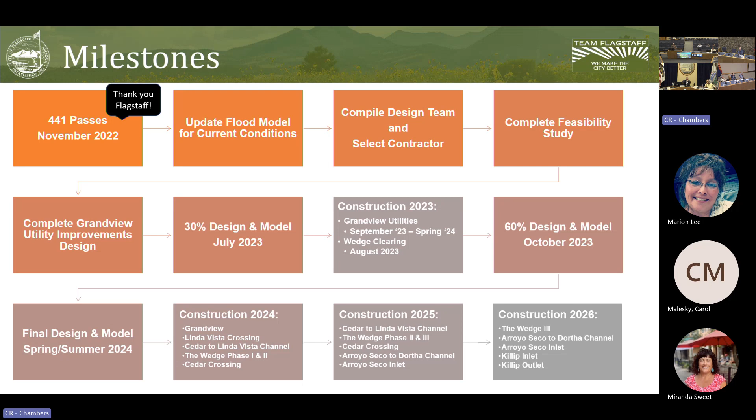Here's a suite of projects, starting from Killip Elementary going up just past Linda Vista. I'll go a little more into detail than this.

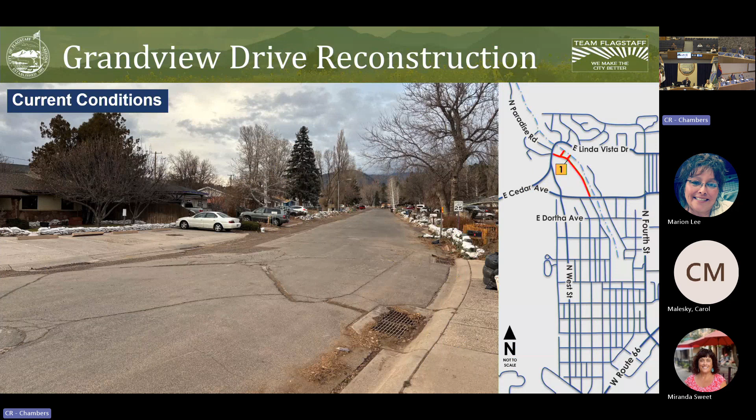First project, Grandview Drive reconstruction. So that's what it looks like right now. Once complete, it's going to be an inverted crown. They've already finished utility relocations, and they're starting on the curb, gutter, and roadway right now.

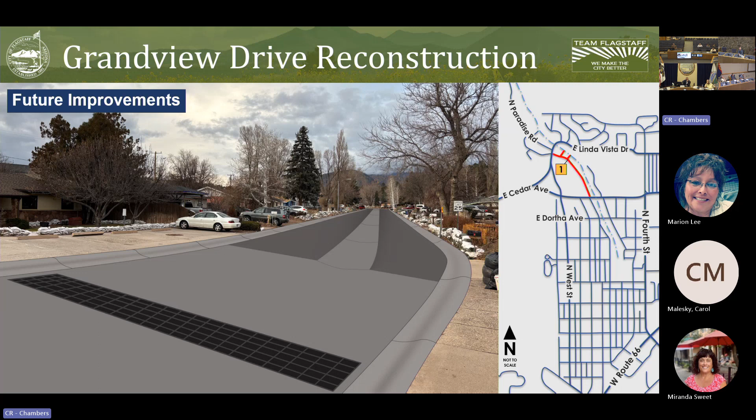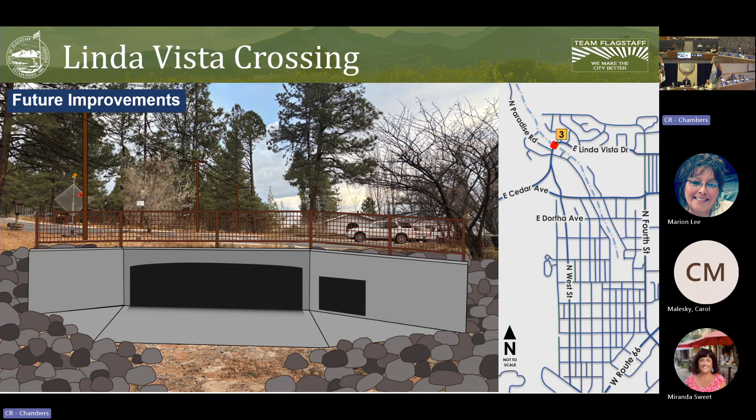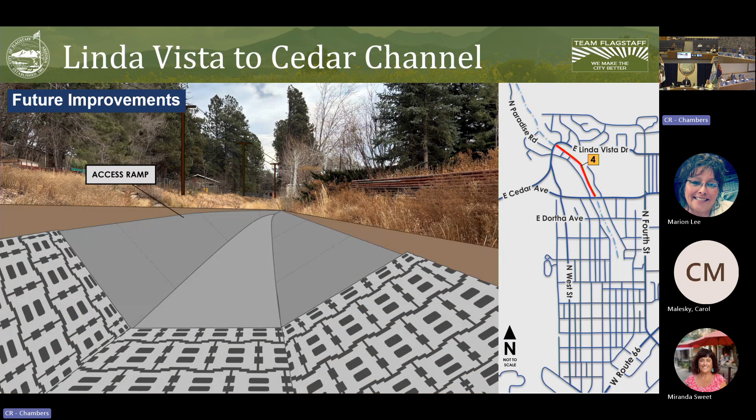From Linda Vista down to Cedar, here's the current natural open channel. That's what it'll look like after concrete - gives it a little more capacity.

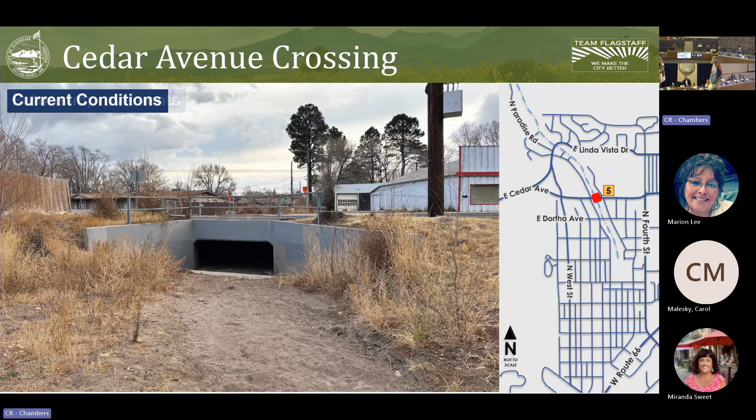Once we get to Cedar Crossing, there's the current crossing. It's undersized right now - we'll put more capacity under Cedar.

Arroyo Seco channel, going from Dortha to the inlet near Arroyo Seco townhomes. This will be removing the existing 60-inch storm drain underneath that channel and making a much larger concrete channel.

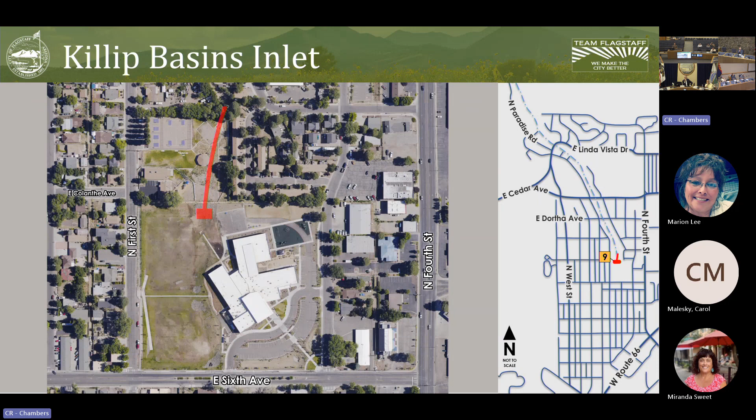There'll also be a new inlet right at Arroyo Seco townhomes, as well as an inlet to push water to the regional detention basins that are already constructed, as well as a new outlet that'll connect to 6th Avenue.

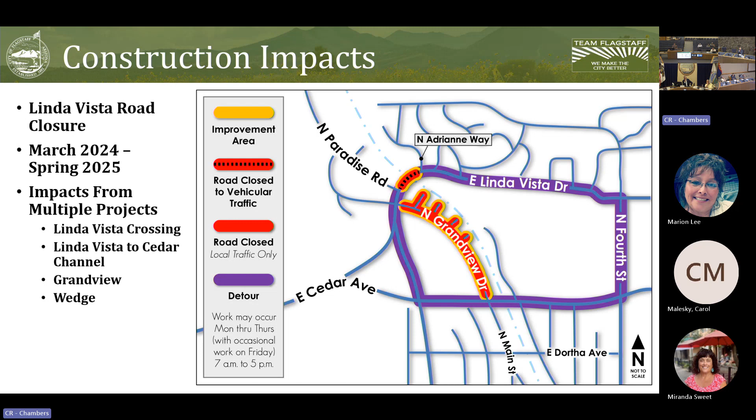Some construction impacts: Linda Vista road closure, that's a big one this spring to next spring because of all these different projects. They need to close that down. You can see the detour if you're up in Shadow Mountain.

This spring, this month, next month, there are utility relocates near Linda Vista. There's going to be some impact to water pressure. We haven't noticed much yet, but we're monitoring that.

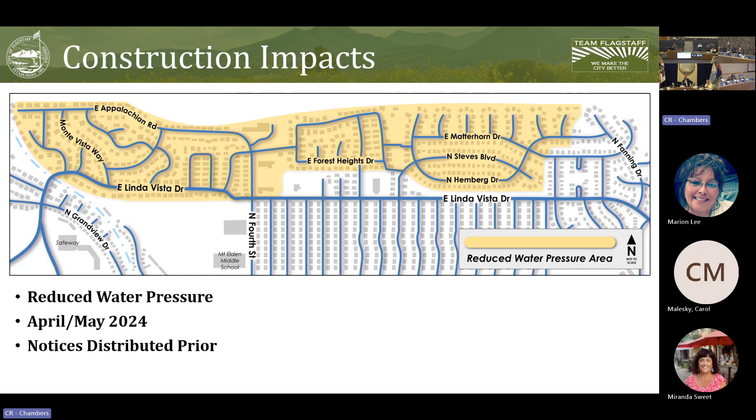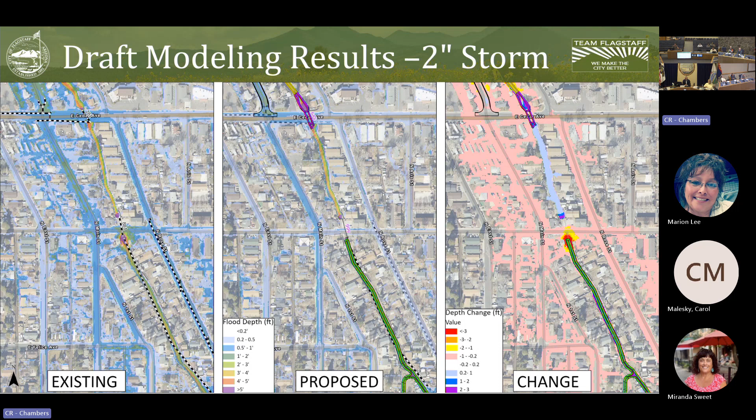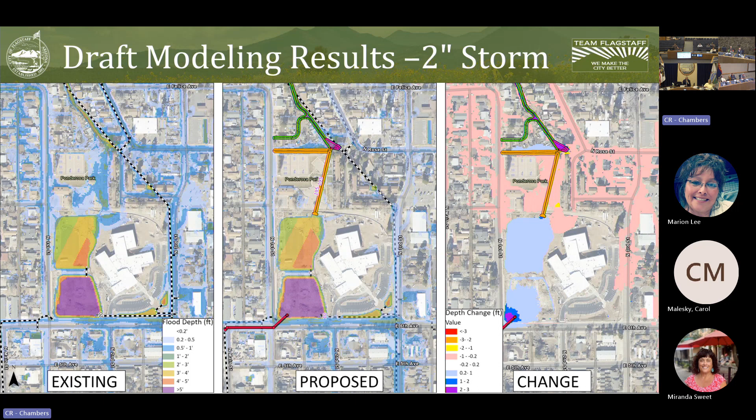Next, I'll talk about Schultz Creek. There's kind of - excuse me, would you like to take questions at the end, or should we ask as we go here? I'm happy to wait to the end. Yeah, I'd probably prefer end.

Stabilization projects in city limits for Schultz Creek, work on Stavana Way, and yeah, the big one is the 180 crossing. That's the long-term mitigation, about 7 million to complete. We're still on track for July 1st completion date. That's a dual 8x5 concrete box culvert going under 180 under Grand Canyon Trust property.

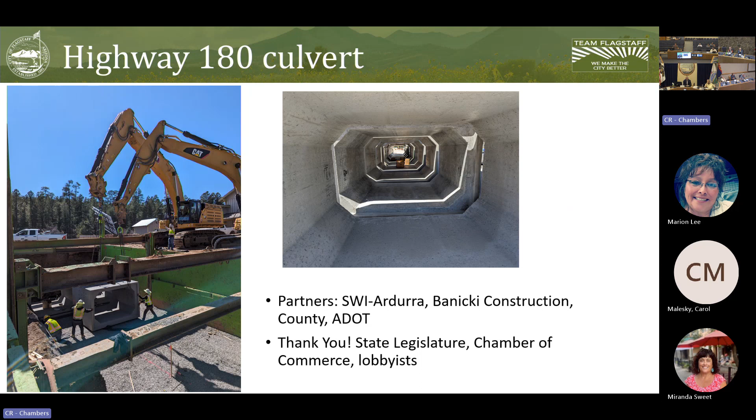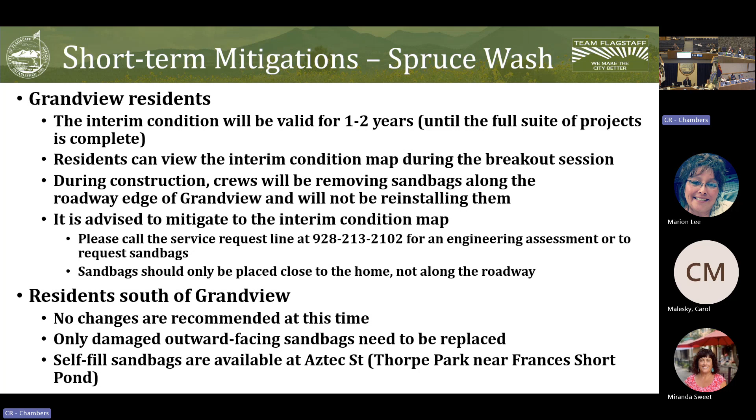For Schultz Creek, during monsoon season, after July 1st when they construct that, we won't have much time to do removal, as we'll be doing monsoon preparedness and mostly flood response, so we won't have as much time. But if there's good sandbags, you can put those back at Thorpe Park near Aztec.

Flood insurance - I'm not a flood insurance agent, but all I know is it's a separate policy from your homeowners. You can get it on FEMA's website. We're a class 5 community in the CRS program, meaning if you're getting an NFIP policy through FEMA, it's a 25% discount. And there's a 30-day waiting period usually to get that policy.

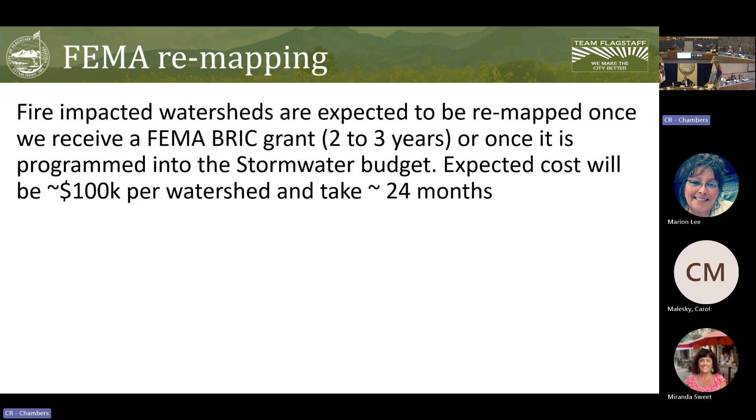FEMA remapping - I'm not as familiar with this, but I know we're waiting on a grant that could be 2 to 3 years, or until we get it programmed into our stormwater budget. These are big letter of map revisions, could be 100K per watershed, and takes a lot of back and forth between FEMA to get these remapped officially.

We have a flood prevention grant through our sustainability office. It's up to $5,000 for flood proofing materials, sealants, floodgates, things like that. Yeah, I can take questions now.

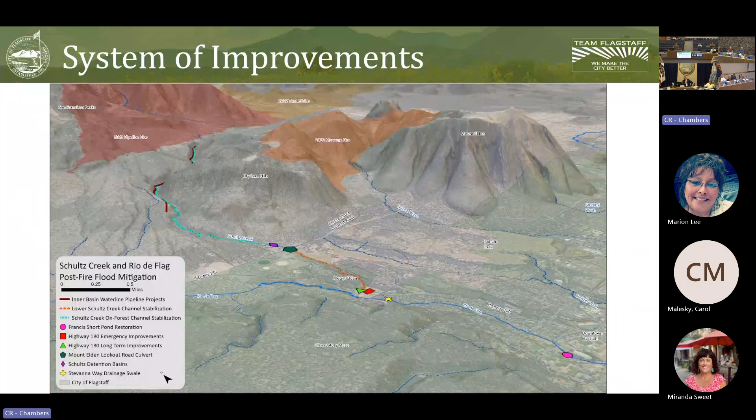Could you go back to that image of the Schultz underpass? There it was. Yeah.

If I'm reading that correctly, it looks like that culvert still has a pretty substantial dog leg in it. I'm not familiar with a dog leg. Well, it's that part that looks like it passes underneath 180 at that angle, versus the main part of the culvert that runs more or less straight out to the Rio de Flag.

Yeah. I don't have an answer for you right now, but I can definitely look into that with our designer. We can get back to you with that.

Yeah, I'm just curious why they opted for that as opposed to a straighter shot to the Rio de Flag. Yeah, this isn't probably a good answer, but basically the best option was to go through the Grand Canyon Trust property, so we kind of had to angle it that way based off property rights and what we could buy. Thank you.

Do you know what the capacity, cubic feet per second, is for that structure? I think it's around 900 to 1200 CFS, but don't quote me on that. If you want an exact answer, I could get you one upcoming.

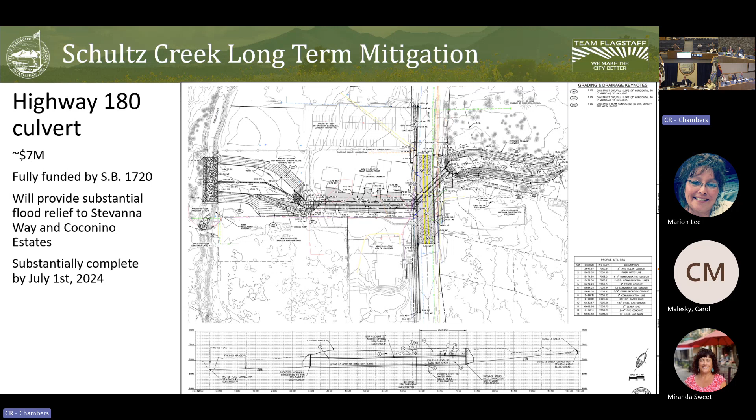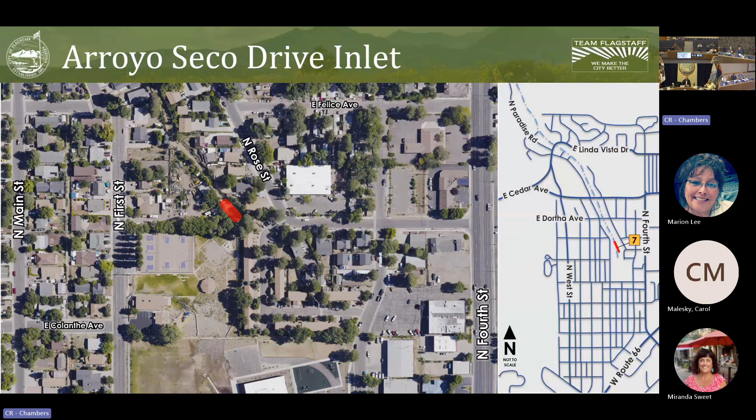Yeah, back on Spruce Wash, could you describe the function of the wedge again? I did not follow what the design concept is there. I've seen the construction across from the Safeway store, and it's kind of a puzzlement how that's going to work. Yeah.

Downstream, we don't have enough capacity, so we have to bleed off. I forget what the CFS is, but maybe 100 to 300 CFS. As everything's passing through the rest of the wash, once that passes through, we'll start bleeding off this detention basin, and hopefully the channel won't be full of water, so we can bleed it off that way.

So it's an alternative route for the water to take. Is that passive, or are there pumps involved? It's passive. As far as how we discharge it, that's still being designed - whether it's an automatic or manual gate, they're still working through a couple options.

What's the capacity of that basin? I don't know that number off the top of my head. I've done some walking up in that area, and there's a couple of retention basins toward the upper inlet. What's the state of that? I haven't been up there for a little while, but those are complete - we're just about to do final walkthrough. Do you know the capacity? Is there two up there, or more than two? I forget the capacity, but those are more for sedimentation, dropping out sediment rather than retaining water.

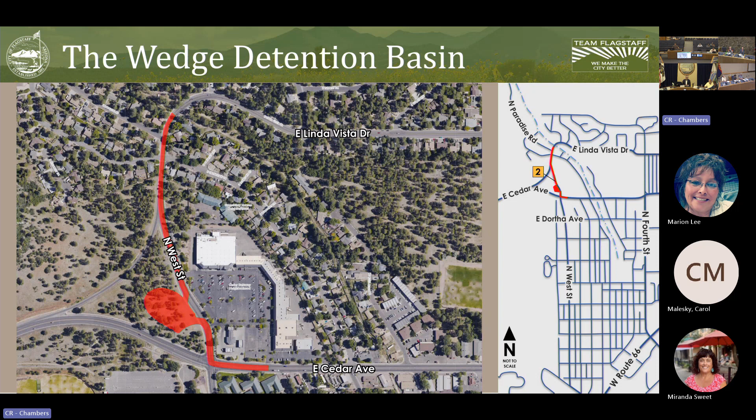At the last meeting, I had asked for an update on the Rio de Flag Headwaters pre-fire study with the County Flood Control District. By way of background, there were some emails not everyone here was included on, Mr. Chair I think you were. The discussion had to do with the County Flood Control District doing watershed management and tree thinning in the upper Rio watershed. There was an email from Ed indicating that the Rio de Flag project would be able to handle most of those post-fire floods, which led us to ask: well, what's going on here? If the Rio project is going to handle these flows, why is the county doing this?

I'm going to try to read this, if it's okay with you guys - dry throat and all. So the question is about the upper Rio forest thinning. There was an article in the paper indicating the city would experience extreme flooding; NAU even produced cost of damages. And then, as I said before, the Rio project can handle most of these flows, according to Ed.

So a couple of questions - you don't have to answer these, and as I speak the ice gets thinner for me, I apologize ahead of time. Did the flood control district study consider the Rio project and its ability to handle these increased flows? Did the city have any impact on this project? I'm assuming the answers might be no. I encourage the city and the flood control district to develop a formal project review process. Lastly, I'm aware forest management has many benefits not related to flooding - I'm specifically talking about flooding. That's it, thank you.

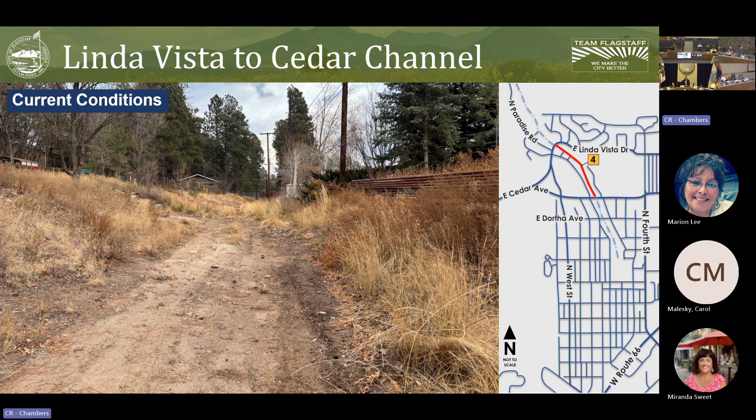Good evening, Commissioners. Erin Young, Water Resources Manager, and I'm just here to introduce Carol - you've seen her many times before. We have an abbreviated presentation that was provided to Council on Tuesday night. They did adopt the notice of intention to increase or change water, sewer, reclaimed water rates. Carol's second slide actually includes the outcome of the meeting, which was a request to have a special work session where council can review the modeling assumptions and we can have a live modeling session with them to check the sensitivity to making changes on those parameters. So with that, we'll go through the abbreviated presentation and go from there.

Any questions before we get going? Okay. Yeah, thank you, let's go. Thank you, Carol. Thank you, Erin, and good evening. Can everyone hear me okay?

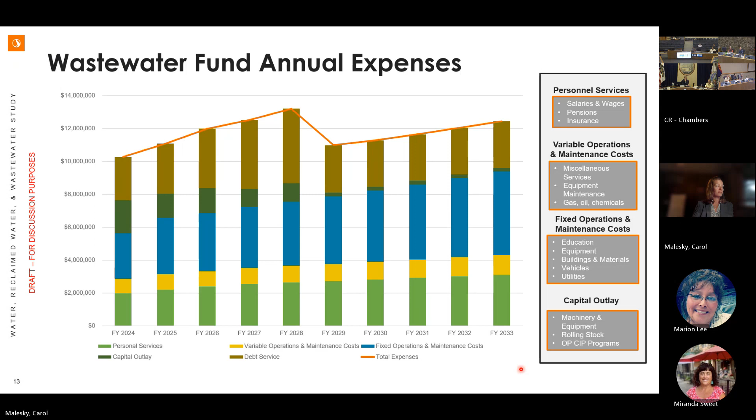The wastewater CIP list is shorter than the water fund list. However, there are some significant projects included. What is not included are 2 main categories. One is this note at the bottom: there are projects that were funded through a general obligation bond with the city, and those bonds are being repaid with property tax revenues. So those projects are not included on this list, and that's not included in the rate calculation.

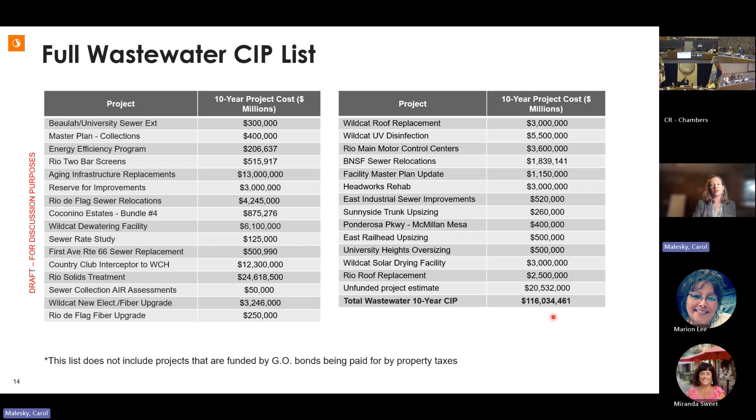Another project not included in this list is the wastewater treatment plant future expansion, which is included in the capacity fee study. But the 116 million of today's dollars in wastewater CIP costs that you see here are what we used when moving forward with the financial plan.

Just as in the water fund, we escalate those capital improvement projects. The total is estimated at 144.1 million through 2033. You'll notice we're fairly certain about the mix of funding in the near term, but as we go forward, we're still looking to fund some projects perhaps with debt or future loans. No grants are forecasted at this point, but that can change, and Management Services is currently looking at all of these funding sources as well.

When we started this rate study, this is the mix of funding we are looking at. Again, the majority of revenues for cash funding the capital projects is from rates. I need to also note that even though we are borrowing money for a significant portion of this capital plan, those borrowed funds have to be paid back, and that is also through rates. So ultimately, that comes back into the revenue requirements each year.

Similar to water, we have this wastewater projected plan to fully fund all the CIP projects we talked about. This plan looks at 2 years of 25% rate adjustments, followed by 15% in 2027, then 10%, then 5%. That initial bump is needed to pay for the current level of projects in the near term. And again, just like in water, once we run this through the cost of service analysis and the rate analysis, a customer may not just see a 25% increase in their bill. It could be less, it could be more.

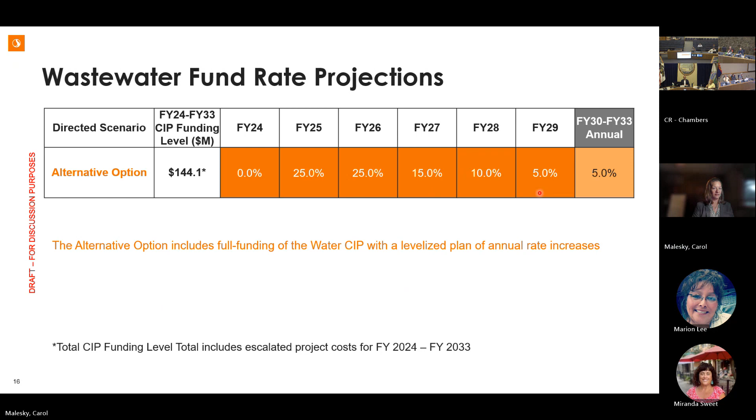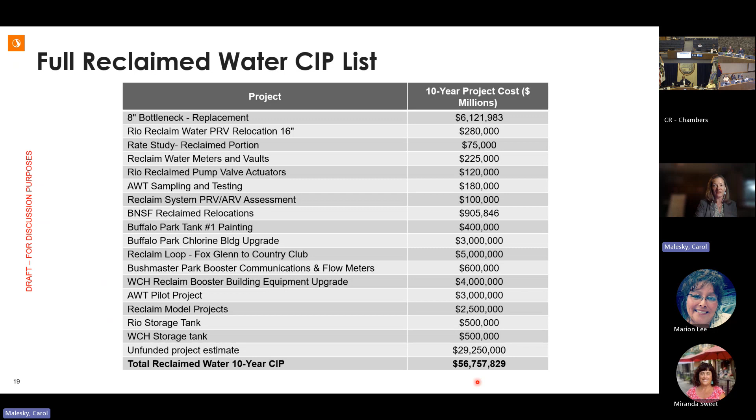The Reclaimed Water CIP list is shown here. The full list with all of the projects that were in the approved 5-year CIP, plus the informed CIP from the master planning process and the unfunded projects, totals almost 57 million in today's dollars. We know that the actual execution of these projects is limited, because of the policy of setting reclaimed water rates as a percentage of potable water rates. I know we've had that discussion in the past, but that limits the amount of projects that can be completed.

Given the potable water recommendations and direction, the reclaimed water direction and rate adjustments will take us to about 11.3 million in projects that could be funded through 2033. This is entirely through revenue collected from reclaimed water rates. That reclaimed water rate plan, directed back in October, again mirrors what we saw in water: 15% rate adjustments.

And we've made it through financial plans. I can keep moving through capacity fees if you like. That'd be a good idea. Yes, please. Thank you. Okay, great.

Capacity fees are that next section of the rate study that takes a look at new connections and growth-related expenses. I'm going to cut to the chase and tell you, based on your review and recommendations and council's review and recommendations, direction on capacity fees are the following items.

We are applying the combined methodology for water and wastewater capacity fees when calculating these fees. There are 3 typical methodologies that the American Water Works Association and Water Environment Federation promotes. The combined methodology is that third method that takes into account historical investments in infrastructure that new customers can benefit from, plus forward-looking investments in infrastructure that are growth or expansion related. So the combined method takes into account both of these types of infrastructure.

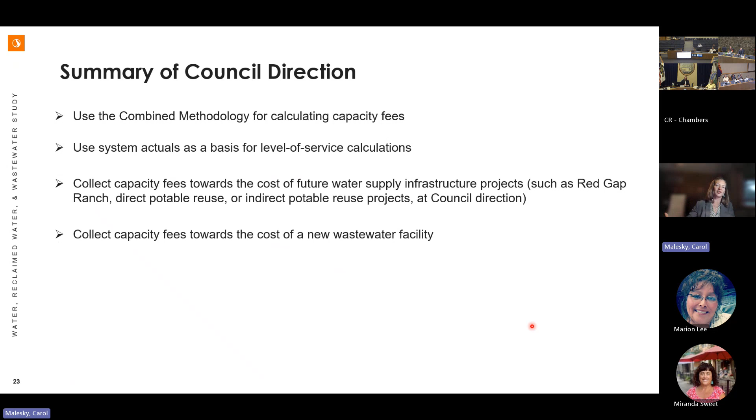And then the recommendation is that Water Services sets aside an amount to help fund those projects in the future. The same is true on the wastewater side. So the direction was to collect capacity fees to start bolstering up the funding sources for a new wastewater treatment facility.

And then finally, we were looking at levels of service for wastewater that included not only a flow or hydraulic component, but also a loadings or strength of wastewater flow component. This multi-based level of service is important because your future wastewater projects are more geared towards increasing the capacity of treating solids at your treatment plant. So incorporating that strength of flow element is important when determining how new customers might impact your system.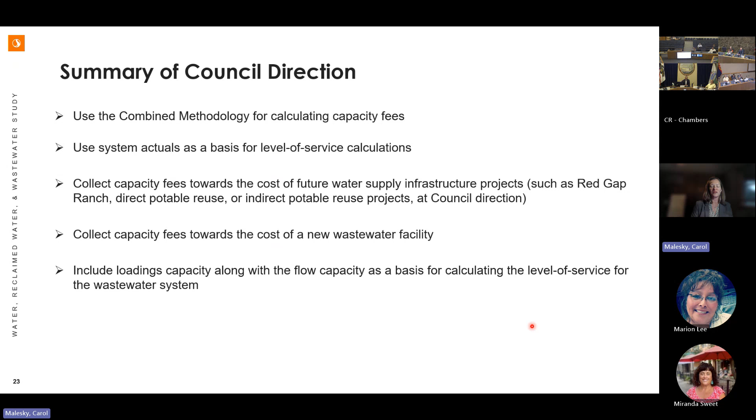Pulling all of these points together, we've calculated the fees, and you've seen these slides before, but I'm going to start with water. The set of water projects that include a growth component is listed on this chart. So we have 70.5 million of the 10-year CIP projects that include growth. However, we've also added in an estimate of $230 million for future water supply projects.

Pulling those pieces of information into the calculation of the capacity fees and going through all the other options, we have the recommended or directed option that we called 1B, the future water supply and new groundwater capacity option. This option used actual system data for level of service, and it included that additional cost for future water supply projects. It resulted in a capacity fee for a 3/4 inch residential type connection, or ERU, equivalent residential unit, of $8,146. That fee is then scaled based on water meter size.

As an example, we show a 2-inch commercial meter. It could be a 2-inch landscape meter. It could be any kind of customer, but it's the meter size that's important here. And that would be an increase for that new customer of about $13,000.

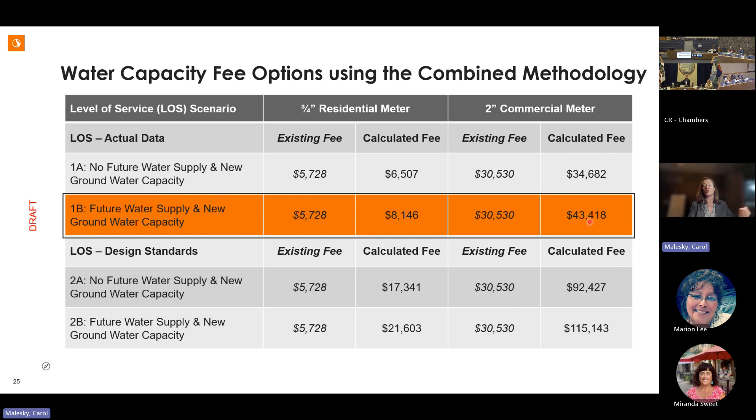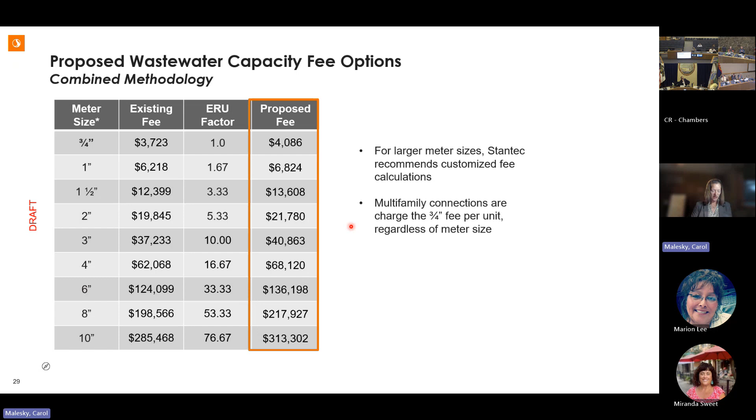Mr. Chair and Commissioner Vane, we do have an assumption here, but it is based on capacity. So if the treatment plant contributes, it increases capacity at 9 million gallons per day. We actually calculate a unit cost in gallons per day, and we say one equivalent residential unit on the wastewater side requires around 300 gallons per day. So that 9 million gallons per day can serve a lot of equivalent residential units. We do the math, it's actually very simple math. We take the 9 million gallons per day and the 245 million and determine what that dollar figure is. I can't do that math in my head, but it's probably pretty easy. Then we add that and say every equivalent residential unit that is added to the system just picks up their cost of that capacity.

Got it, I understand. Thank you. Okay, good. Thanks.

Any other questions on this?

What I wanted to avoid was the perception that when we get to the end of this rate study period, there's $240 million sitting somewhere to fund all this, because it could be interpreted that way, and it'll be a shocker for those in the community that didn't quite understand that. So that's why I'm asking.

Mr. Chair, thanks for that observation. We don't have that in our report right now, but I think we need to make that clear. Because if you got all of your equivalent residential units that would use up the 9 million gallons per day, the calculation should result in 245 million, but that doesn't happen. Growth happens over time—you have to build the project before growth all shows up. So it's just a unit cost of capacity. We'll make sure we mention that in the report.

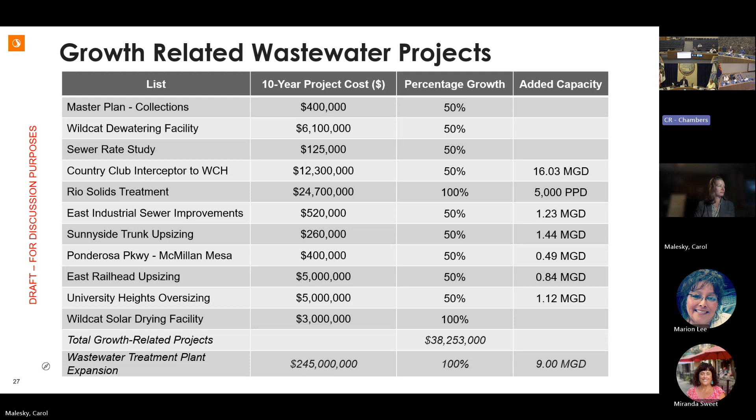When you go back to that table, you can see using the design standards really drives that number up, because the design number—for wastewater it was like 360 gallons per day—is higher when the actual use is less, but you still have to build to the design standards. So your meter placement would still be for that design.

To further what Carol was saying about the capacity and the wastewater expansion, you can see it on the chart. Even if we were to use actual flows and loading - options C and D - the first option did not include that expansion, and option D with the wastewater expansion included shows a delta of about $200 difference in capacity. So on a $240-250 million project, the difference is about $200 per equivalent residential unit.

To her point, we're not looking to recoup all of that, and we knew that at the time. Capacity fees are currently about 6% of the revenues coming in. We know there are other opportunities for funding - grant funding, cooperative partnerships - that'll be looked at. Even though it wasn't currently programmed in the 10-year forecast, we knew it was coming. The sooner we start carving out revenue and setting it aside, the better position we're in compared to waiting till it hits the plan - that impact would be different, and getting ahead of it allows for a compounding effect.

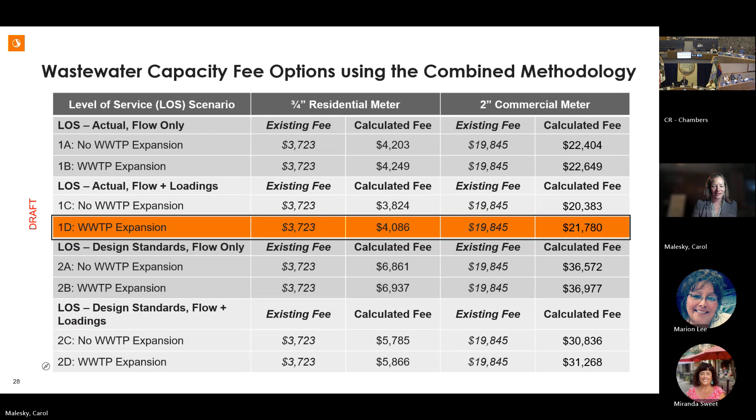I'm going to move on to miscellaneous fees - this is a new section for us to discuss. Miscellaneous fees are charges for activities that water services and customer service still perform, which take time and cause costs, but they're charged in specific fees so that revenues from rates don't have to support these services.

The miscellaneous fee calculation process is pretty straightforward. We met and had many conversations with water services and customer service staff about the items that would be recovered through these fees. There are several sections in the city's code that outline these fees, so we looked at which fees require which staff members to do what types of activities and how long.

We also added equipment costs, such as a truck, and other expenses like materials - water meters was a good example, where you could take the identified cost of service and build up the fee from there. We have a model for these calculations, and experience with other utilities charging similar fees, so we could compare typical approaches for things like late fees. Then we look at the implications of the calculations, because 100% cost recovery isn't always the policy followed, and there are good reasons for that - we'll go over a couple examples.

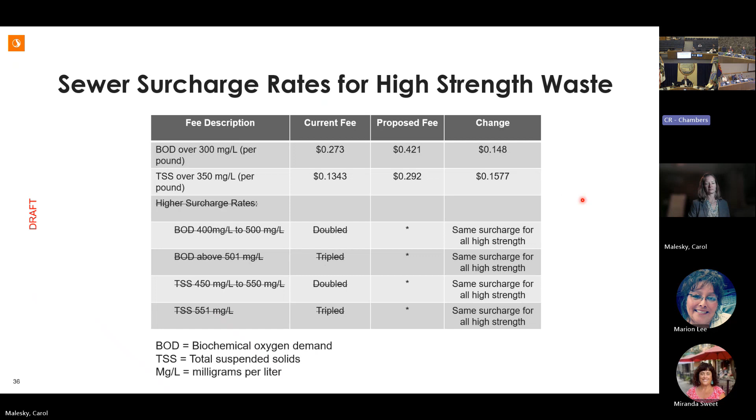Yeah, one of those numbers I was curious about, if we look at the capacity fees and the installation fees and everything, how much does the average price of a single family home increase as a result of this? Do we have that number? Again, I'm just curious about it. Somebody, certainly the Chamber of Commerce, must ask this question.

So you can go to a website and do your own bill and actually update and see, right? There's a tool for that. But with capacity fees for the meter and installation, I mean the builder, when they put in the three-quarter inch meter and all that, how much more does it cost?

So it is something we can look at, but I don't think you can apply a single number. Also, the reason the fees are broken down is some of these are case by case. If the water main is on the east side of the street and you're building a house on the west side, it will cost more than the person who built on the east side, because that line is 60 feet longer, right, that's another 60 feet of copper, another 60 feet of trench. So it seems like we're being granular and petty, but it takes the burden off recovering that through your monthly volume. It's kind of case by case, but when you look at those fees to install, that's the dynamic.

What's the meter size? Well, just for a typical installation, the capacity fees are bigger than the cost of installation of the meters anyway, I believe. But for a three-quarter inch meter, standard single family home, how much more is it gonna cost them? Just curious. Right, so I do believe the information is there and I can definitely add those up and give you a typical number. We could calculate that.

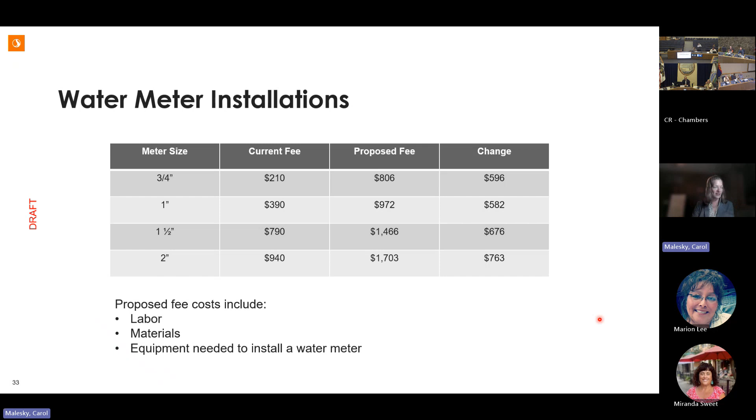If not, we'll go on to the last and largest component of the rate study, which should be the freshest in your mind. These are the cost of service rates. If you remember, we went through the process of determining the priorities for setting rates, and the leading priorities were revenue stability, conservation and demand management, administration or administrative burden, and proportionality between and within classes. We were calling that equity, but we've renamed it to proportionality, and then affordability.

We used these priorities to present to you and City Council a series of different rate designs and rate structures for water and wastewater. Tonight I'll just talk about the selected or preferred alternatives. I have one set of new slides I'd like to talk about, but I'll start with the water rates.

We had three different options, with a revised option for the water rate structure. The selected or preferred option was what we're calling option 3 revised. That option has a combination of the fixed monthly meter charges and the volume charges, with some adjustments from your current water rate structure today.

The monthly fixed meter charges today are charges by water meter size that every account pays every month, regardless of any water used. The charges today recover about 29% of the water fund's annual revenue requirements. Remember that the minimum policy for the water fund is 25% of total revenues to be recovered through those fixed monthly charges. So our option 3 revised structure reduces those fixed meter charges and meets that target of 25% cost recovery.

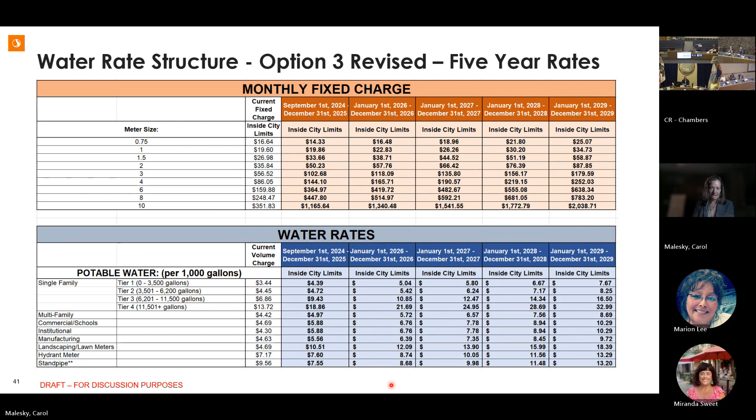When we last spoke with you, we talked about average bill impacts for specific types of customers. These are not average meter sizes. We are calling them representative meter sizes because each customer class has varying meter sizes. Single family, of course, is most commonly 3/4 inch. And the average monthly volume for a single family resident with a 3/4 inch meter is about 4,000 gallons a month. That current bill for this fiscal year is $30.91 for a customer using 4,000 gallons.

Then we are looking at bill impacts for applying the rate adjustments, the cost of service adjustments, and the differences in the customers' classes. The total bill again equals a water fixed charge component and a water volume charge component. The values we're showing you here don't include the water energy charge or any of the taxes or anything like that. I'll show you a slide later that combines everything. So this is strictly the water fixed charge and the water volume charge.

The bill projected for this type of customer would increase by $1.13 a month, and that's about a 3.7% increase.

What you'll see when we go through each of these representative customer types is that the percentage changes vary. Remember that slide when I talked about a 15% rate adjustment doesn't mean a bill will go up by 15% for everybody. In fact, none of these examples go up by 15% in this first adjustment. They're lower or higher. And we do recognize that this landscape customer, for this amount of usage and this meter size, shows the largest increase of almost $140 a month. And that is because the cost of service results show that the higher usage and higher peaking of this customer type drive those rates.

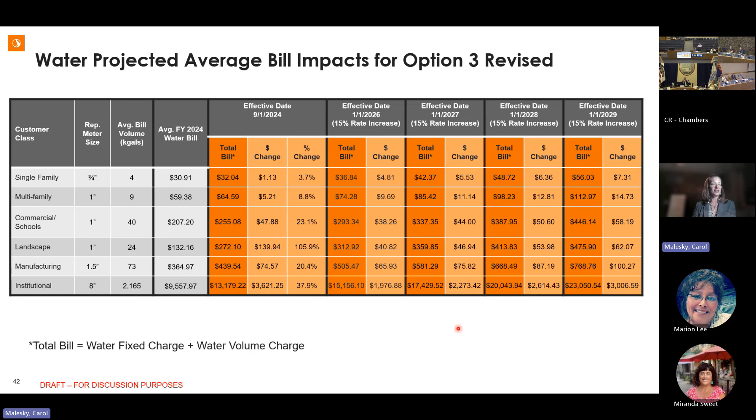I've added a couple new slides, and in fact City Council did not get to see these on Tuesday. But in order to address concern that we were omitting a discussion of non-residential tiers, I wanted to address this. This is not a complete evaluation of these tiers — I just wanted to bring up a couple points and give you an idea of what went behind our analysis and our ultimately moving on from the non-residential tiers for now.

So the elements of a tiered rate structure are outlined in the American Water Works Association Manual M1, the principles of rates, fees, and charges for water utilities. There's a big discussion on inclining block rates or tiered water rates. Their main point is that tiered water rates are best applied to customer classes that have homogeneous usage characteristics, meaning their usage is fairly consistent across customers within that class and have typical peaking and typical usage patterns.

When we looked at the distribution of the commercial classes' usage and landscape usage, we found it was very difficult to see the homogeneous patterns that we see when we look at the residential class. I've got a couple of charts that I'm going to show you. But that was our first step: to evaluate the usage patterns of these customer classes, just like we did for single-family residential.

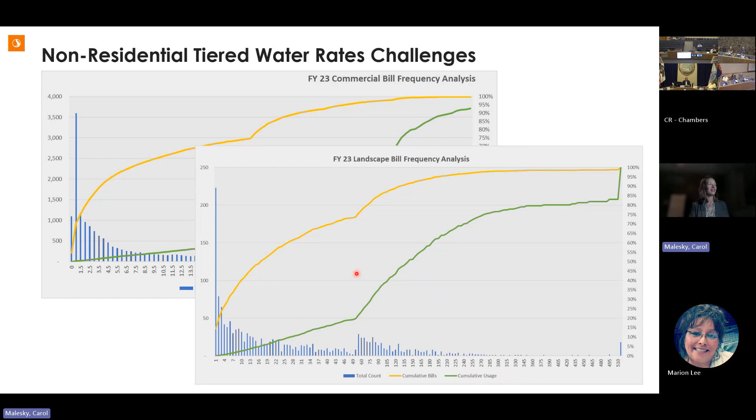We're almost done. The wastewater rate structure that was selected was a combination of a fixed charge and consolidation of the volume classes. We called that option 3. The total wastewater bill we're showing here would be a combination of the fixed meter charge per month and the volume charge for your billed sewer flow.

The monthly fixed meter charges are not in existence right now, so your current wastewater rate structure does not have a monthly fixed charge, but the proposed charge would be set to recover 25% of the annual wastewater fund's revenue required. The remaining 75% of the revenue requirement would be recovered through the volume rates.

The current classes are here, and as mentioned earlier, the classes are currently established based on strength of flows. So car washes and laundromats, etc. have separate rates based on the strength of their wastewater flow. The proposed consolidation groups like concentrations of strengths of flow together, so like classes. We're proposing non-residential A, B, and C, with A including car washes through hotels and motels.

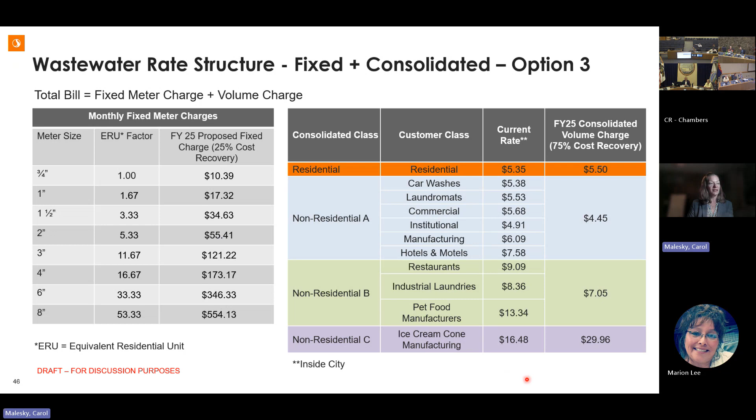Those concentrations and pounds of wastewater discharge are in a certain class, grouped together, and the volume rate there would be $4.45 for fiscal year 25. The higher strength customers in the group would be restaurants, industrial laundries, and pet food manufacturers, billed at $7.05 per thousand. The highest strength customer is in a class by itself, and communications have already been started with that particular non-residential group C. Again, these are inside city rates. There would be a 10% surcharge for outside city rates.

The rate structure we were talking about, option 3, and the projection of the 5 years of rates is listed here. This is the new part of the schedule, so you would have a similar table to the water fixed charges and the reclaimed water fixed charges. These rates would be in effect September 1st of this year, and they would go longer than 12 months, through December 31st of 2025, and then the rate adjustments would be on January 1st every year thereafter.

And I should mention, I can't believe I didn't mention this yet, but Mr. Chair, you mentioned this: you can go online to cleanwaterflagstaff.com and put in your bill and look at an estimated bill impact. We have a bill calculator online that will forecast as long as you go all the way out to 2029, if you like.

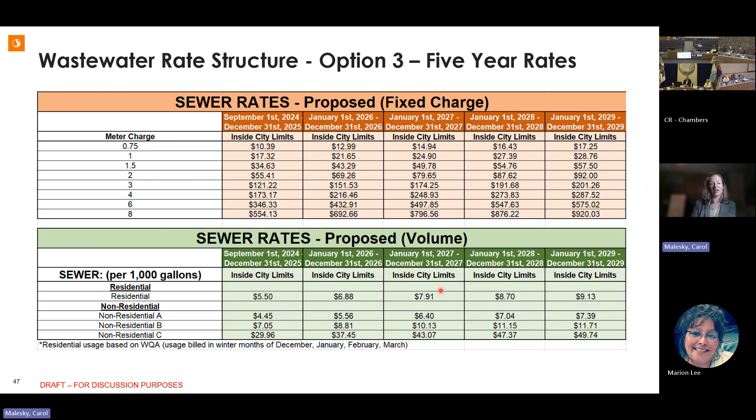Similar to the water fund, we're showing the wastewater bills projected for some typical representative customers. We're only showing the total bill as the wastewater fixed charge plus the wastewater volume charge. I'll start with residential. That representative meter size is 3/4 inches, and we're using the wastewater billing data, so we have an average bill of 4.88, or 4,880 gallons. The current water bill for that particular customer would be $26.13 today, and with this change, it would go up $12.24 a month.

This is the adjustment in the first year, effective September 1st. This is the adjustment for the cost of service analysis and the new revenue requirements for fiscal year 25, so that percentage change is larger and different across customer classes. You'll see some customer types with a decrease in their wastewater bill, and that's a result of the cost of service analysis.

That is the case for September 1, 2024, the first adjustment. Thereafter, every customer, every bill would see the same percentage change. This would be across the board 25% on the bill for the second adjustment, January 1 of 2026. Then it would be a 15% adjustment in 2027, 10%, and then 5%, based on our current financial plan and forecast.

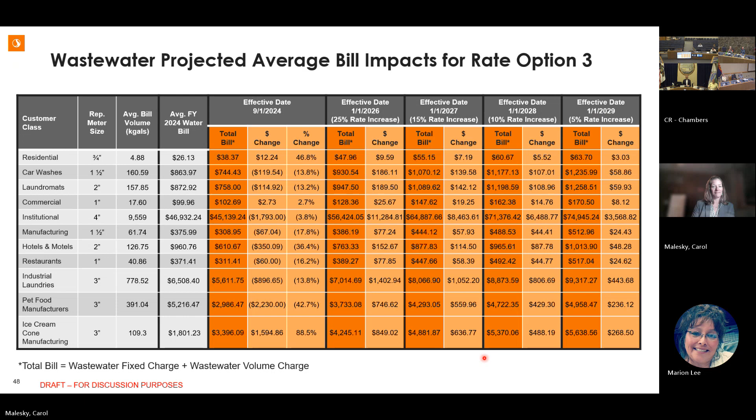Go ahead, Carol. Okay, thanks. A couple more slides. We have two slides that show a combined bill impact for two typical customers. Way back at the beginning of this study, we looked at some typical municipal services bills. One was for a residential customer using 4,550 gallons. Every component of that customer's bill was presented, so what they actually see when they receive their bill. The items in yellow are what we are talking about tonight for this customer - the water charges here and the wastewater charges here. The other charges are also part of a customer's bill.

You've heard about the energy surcharge, and in fact we know that will change in the future, but for our proposal for projecting a bill to 2029, we don't know what that will be at this point, so we're holding it constant. It is unlikely to be constant. As well as the water protection fees - those two fees will likely be different and affect this bill in 2029. But there is a stormwater fee component, solid waste charge, all of these items and state and local taxes get added to a customer's bill.

We just wanted to show that given the current rate structure and the current rates in this year, 2024, that customer's total bill would be just over $100. In 2025, with the proposed changes to the water and wastewater rates and rate structures, we would see an increase in that bill to $115.94. But then there are other components that are going up as well. So after implementation of these proposed rates, the bill would be $115.94. And then fast forward to 2029, we're projecting around $168. Just to give you an idea of what the bill a customer will see in 2029 versus today.

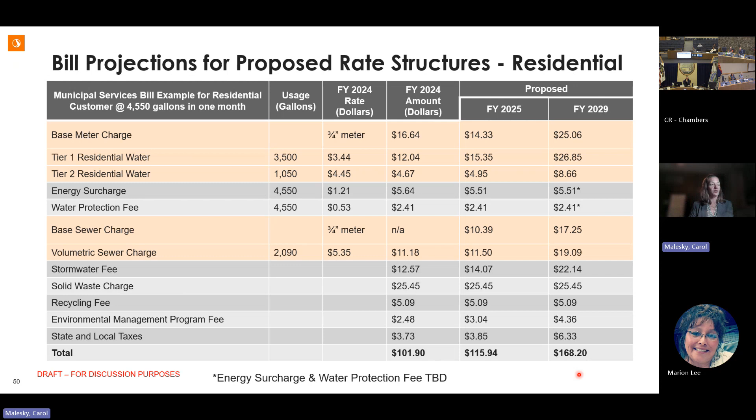We show the same thing for a commercial customer. This particular customer has a 3/4 inch water meter and uses 51,750 gallons in a month. You'll see that the estimated bill today is just under $1,000. After the changes, the bill would be $1,010. And then by 2029, $1,450. So these are all estimates, but it just gives you an idea of what we're facing.

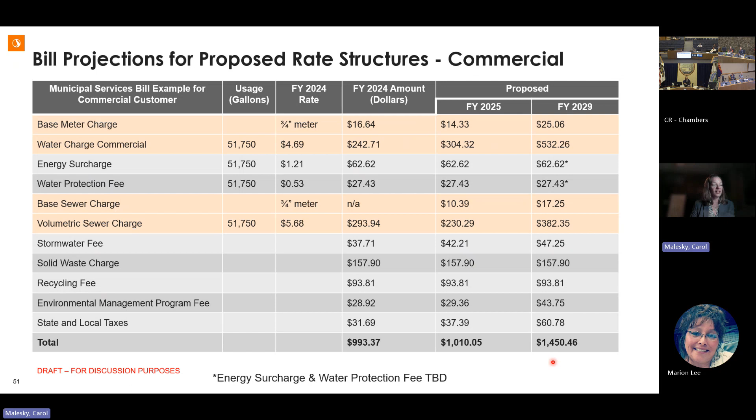You might wonder what happened to reclaimed water - it's my last set of slides. The reclaimed water rates, as we discussed, are still set to be investigated over the next 6 months. So given where we stand today with the current reclaimed water rates as a percentage of the potable water rates, and given the proposed water rates, we've calculated the projected reclaimed water rates for the next 5 years.

Please note that the monthly fixed charges for reclaimed water are the same as for potable water - there's no proportion of the potable water rate, they pay the same. But for reclaimed water, if you get out your calculator, the actual reclaimed rate is the percentage listed on this chart of potable water rates, but it's the potable water rate plus the energy surcharge rate, or the energy rate, excuse me. So you have to add those two together before you apply the percentage of potable to get your reclaimed water rate.

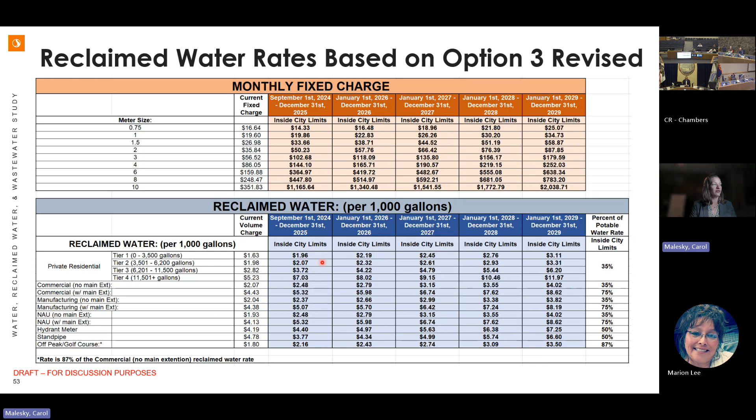Thank you for sitting through a review of all of these charges, rates and charges that come out of the cost of service study. So we looked at all of these components except non-rate revenues. However, these are all important factors to understand when looking at the big picture. Thank you, Carol. Again, excellent.